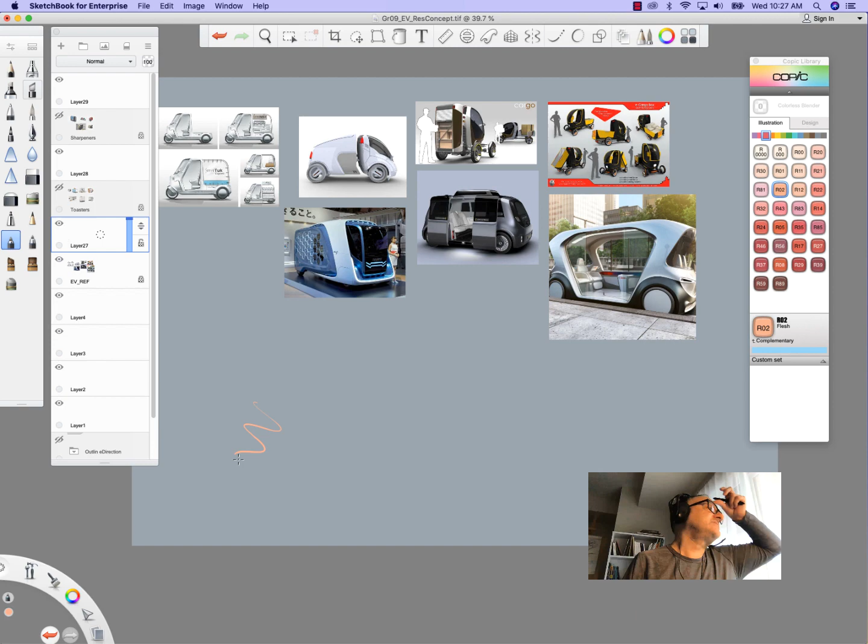I'm going to take some colors here and have some fun. I want you to look at my screen at this point, at the items I have here. I'm going to really simplify it without thinking too much about the technical side of how this is going to work. It's a conceptual exercise, and I'm just going to look at form.

Looking at this one, what do I see? I basically see this - boom, and then one over here. Don't worry about all these details. Ultimately this is a rectangle with some wheels in front. Then from the rectangle you get into another layer and start cutting these pieces. So this area here is simply for the delivery items to be stored, and this is, I guess, person-driven. Ours is going to be autonomous.

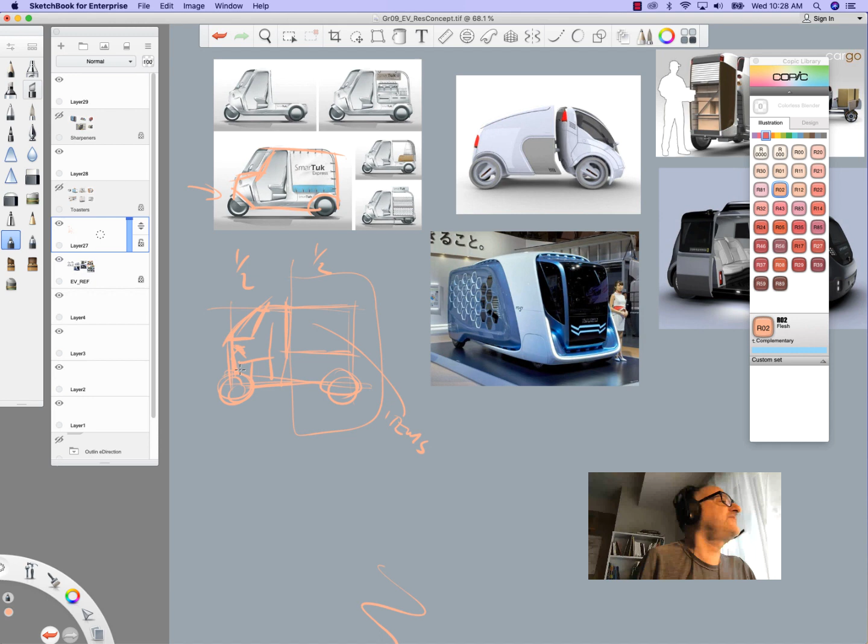So we do need a system in place. This is almost half, as you can see it's divided. If I'm looking at this without worrying about the details - don't trace this stuff and say here's my design - just think of the simplicity of form. There's a form, it's an electric vehicle of sorts, no problem. But at the end of the day, the design is simply this shape - a rectangle with wheels. Can we remember that? That's it.

Now let's look at the one over here. I have no idea what this is - it's an Isuzu - but at the end of the day, I'm looking at a rectangle again, with something here and another box here. These are the big shapes, so the wheels are in the back, somewhere like that. The form is simply a bus or a number of cubes, and you can divide this any which way you want. Once you have this overall frame and say it's a rectangle, then you come in here and it's kind of cool.

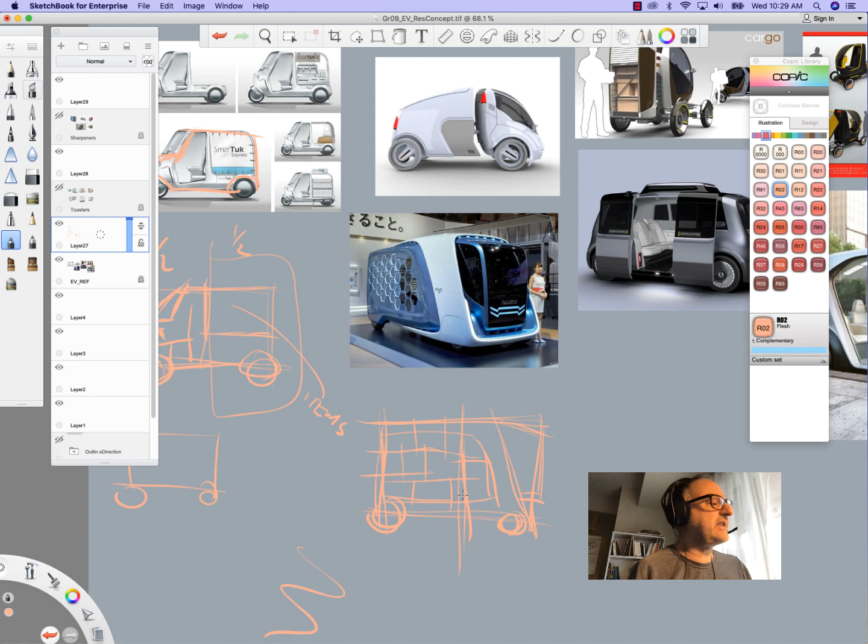I don't know, I can store all my groceries in boxes, I guess the mechanism is going to be here and so on. Right now it's just a rectangle. I'm just trying to show you patterns - that's where we're starting here.

If I go with this one, which is really cool, I like how it says to me maybe I have something here - it's 1/3, and then 2/3 is this. Notice again, same idea - the wheel is always somehow at the back, and right here it's this. That's all I'm seeing here. This is all orthographic, one view - you don't need perspective or isometric. Right now we're just analyzing forms, so there it is, 2 rectangles.

The minute I do this, look how cool that is. The design continues - we don't need to do this at the moment. We're just looking at it and going, okay, proportionally, this is what I see, 1 and 2.

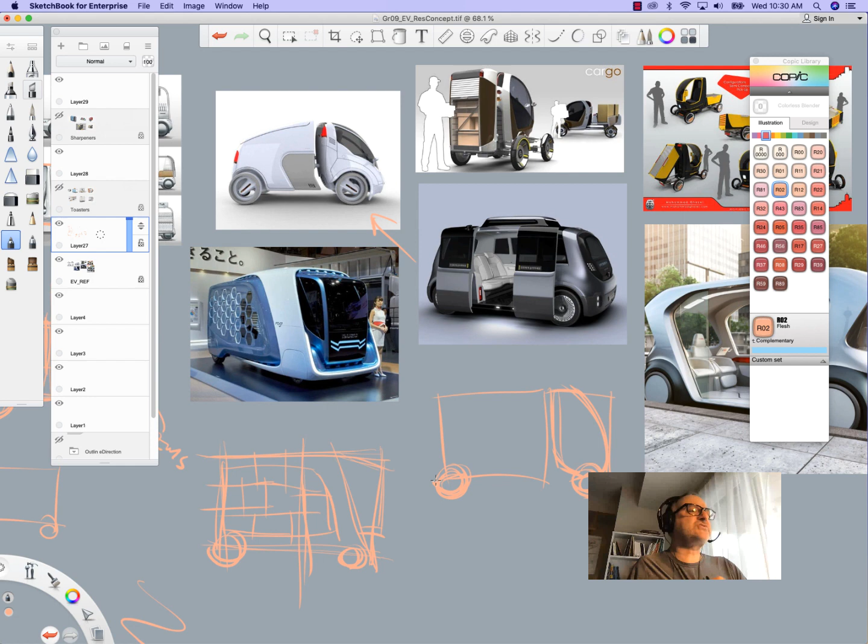So here I'm actually going literal. I've gone into the electric vehicle world, typed in Google 'EV delivery system', and found all these images. I'm just going to blitz through these. You can see here, this is kind of cool - this is definitely a delivery system and the person's in the front, but for us it's autonomous, something like this. Again, the 1/3 and 2/3 proportions - the wheels are here. This one is a little different.

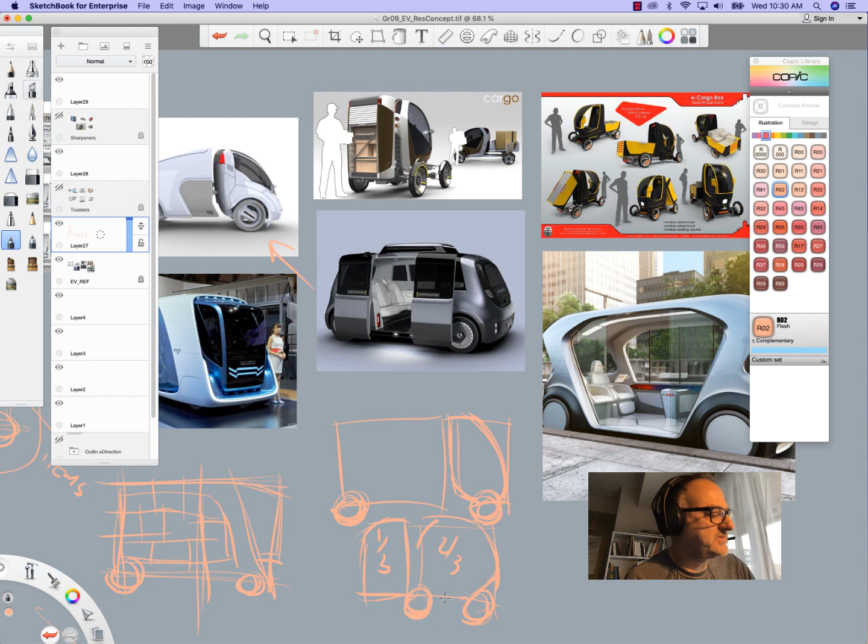Okay, and then once you're at the point later on in your design, that's when you add the curves. You can make it all very futuristic, maybe come down, whatever. So this is kind of interesting, it's over here. I'm gonna look at one more and show you something else.

This is literal, some of you will appreciate this later. Let's look at this one quite simply. All I have is this, guys, look: one towards the back here, and this is inside more. That's all that is. It's a rectangle, it's a box. Wow, how complicated was that, guys?

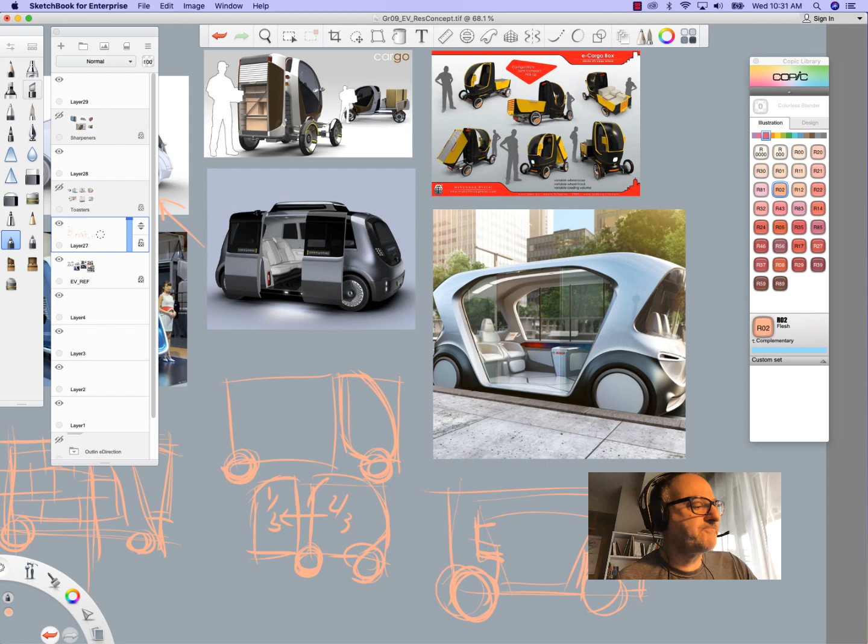And then the designer went in here and said, yeah I get it, functionally I have these seats over here, I have another one here for people to sit in. Maybe this is some kind of a bus mechanism. But it's kind of cool, right?

But look at this, you start with this, right? Here's the overall idea, then you chisel in, you go and say, oh yeah, this is where the autonomous system is, and I'm gonna start adding these curves. You see that, guys? This is design.

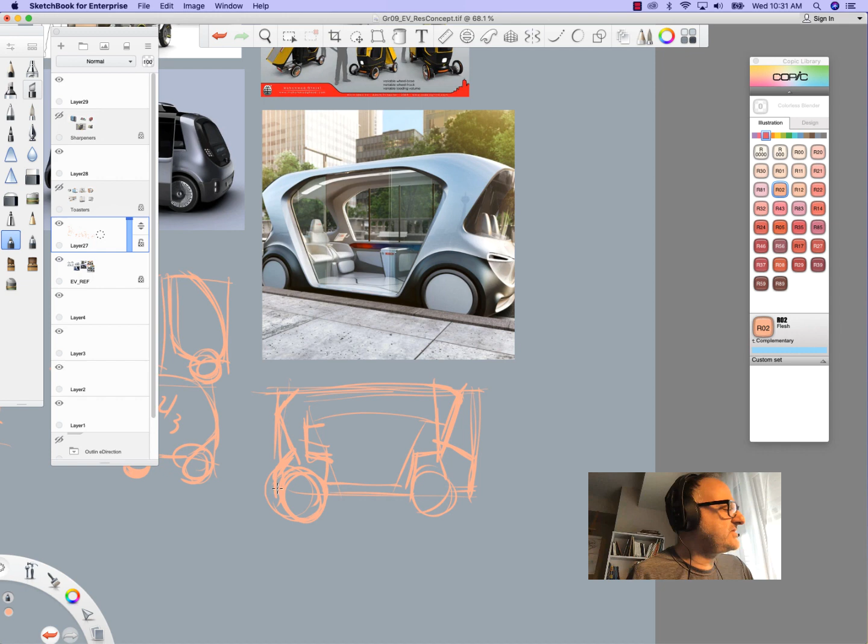You can't jump in and go, oh yeah, here it is, this is what I'm gonna do, Mr. Balian - I've got this idea that goes like this, there, and then here, and I'm gonna put a wheel here and another wheel here. You can't get there unless you start simply here.

Then you divide and say, okay, what do I got here? Well, I want my wheel to be around here, so that the back is all storage for me. And these are slot systems where things come out from the side, who knows. Okay, so really it's a box.

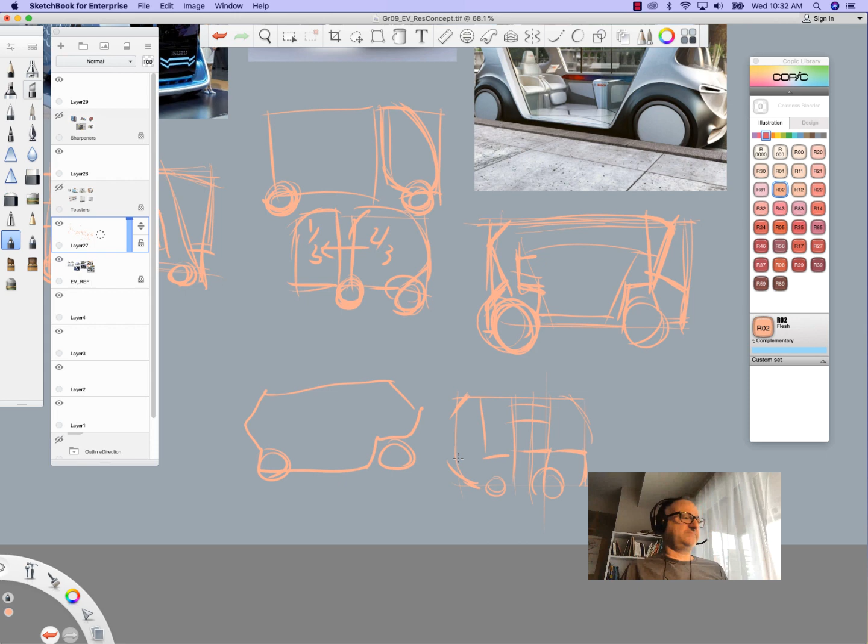And then you start having fun afterwards. You start going, yeah, you know what, I'm gonna make a room here, and I don't need this part, I don't need that part. You round off things and so on. So let's not copy, let's just open up our minds to possibilities, okay?

Now, as I mentioned, here's my hint: these are all electric vehicles, aren't they? And at the end of the day, I said to you guys, all I'm seeing here is a bunch of boxes. Look, rectangles. That's all I'm seeing, really.

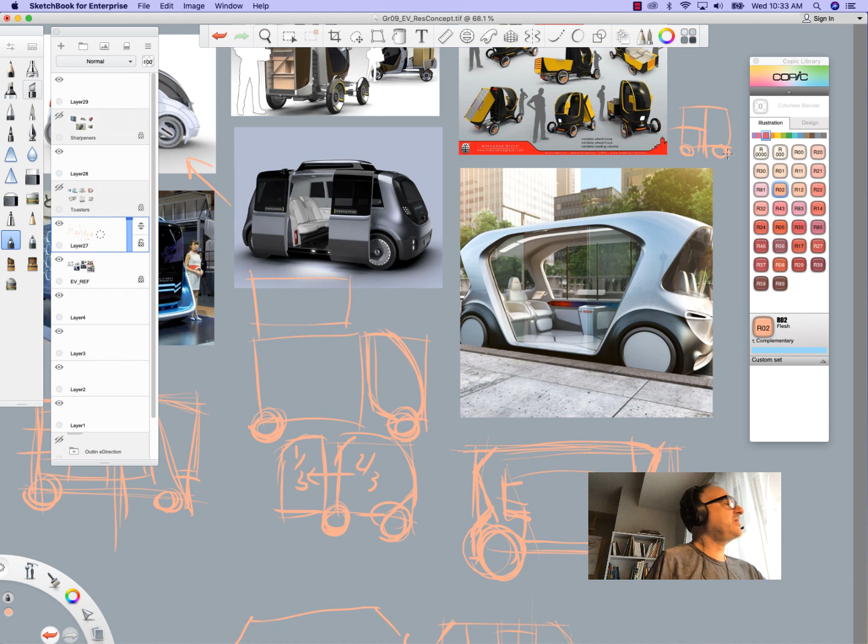Okay, this one again, this one's a box too, and I'll just go like that. That one has that division, and then you've got a wheel here and a wheel there. It's a box, that's it. Okay, so I'm gonna hide this, get ready for the next one. This is kind of cool.

This is how we change the frequency, okay? Whoa, what's all this about, Mr. Balian? Look, guys, these are toasters. So what if I use toasters to inspire me for this design? I don't know, I've never heard of that before.

So now we're taking away the literal research aspect of it, as in, always the first step is research what you know. But as designers, eventually, guys, this is stuff that people are doing at industrial design schools, at the post-secondary level. You're learning this in grade 9, okay? So look, I'll look at these toasters.

And I can say, look at that, oh my goodness. Let me just go up here on that layer, and I'll say to myself, well you know what, this could be a vehicle that has these kind of cuts in here. Okay, so you see, and then I can do that, whatever.

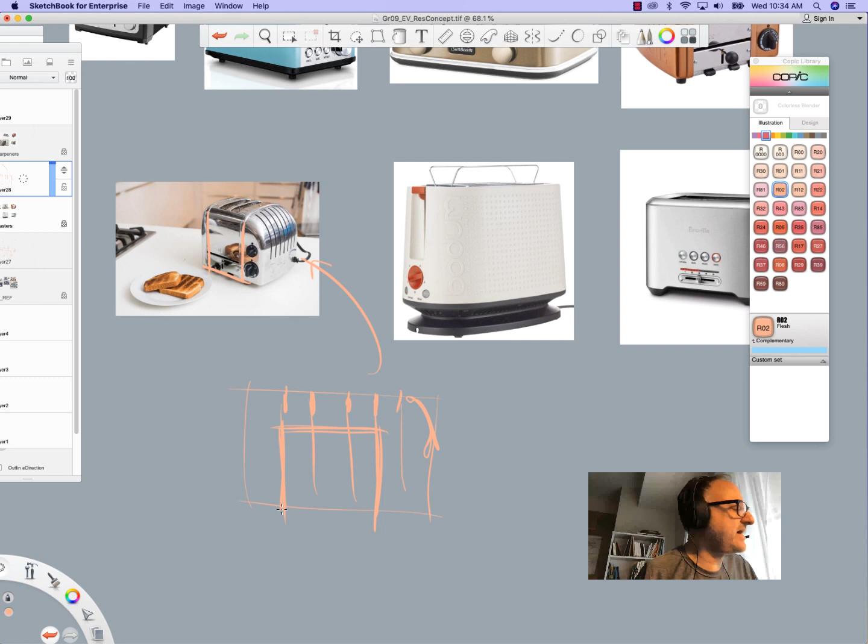So I'm learning, I'm also noticing that here and here there's a panel. So if I ever wanted to add a panel in my design, I can say this is where the items come in from, and here are my wheels. And then these ribs over here, opening light comes in, I have no idea, right?

So you can say you're gonna take that - I'm looking at this toaster and I see this kind of pattern here. What if at the side of my vehicle, my electric vehicle, there are solar panels? Never heard of it, but why not? In this pattern, see - I'm looking at things and I'm getting inspired, okay?

And I like the fact that there's the cutout here. So another item is, let's say this is the front of my car or my vehicle, who knows what, my van, I don't know what. I'm gonna make the front of the car look like this, okay? There's a cutout here, and this is the glass, and this is where the navigation system is, whatever. You see, I've just taken that and cut it out of a box.

Everything looks like a box. Okay, let's go. So again, you get where I'm going here, okay? If I look at this again from the front view, in orthographic view, all I'm seeing is this little line across, a big circle, and little circles here. That's all this is.

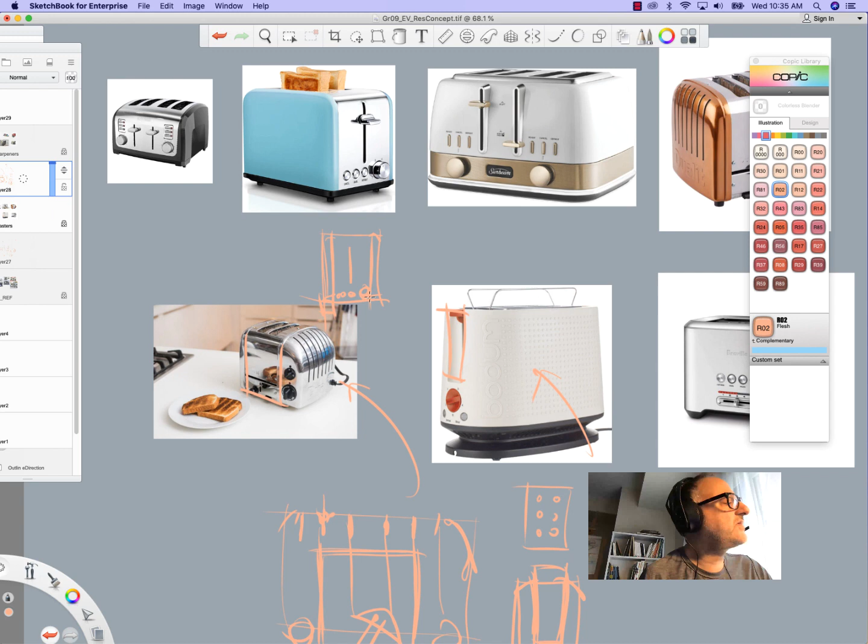So what if I had wheels here? What if I had wheels there? There's the front of my vehicle. Do you get what I'm doing? Side of my vehicle—oh, okay, I can have different panels.

See, I'm borrowing ideas. So let's look at this item here—I should have made these more spread out. Here's another one. Ready? Rectangle. Wow, that was tough. So here's a different material right here. You decide what that is.

Okay, so here's my system. I'm gonna go like that, one-third. I'm gonna go here, and I'm gonna make this all a panel of some kind. How cool is that, right? I have the other one right there. I'm done—like I've got a starting point, right? And the same goes for here and there. You get where I'm going with this.

This is becoming a long lesson. However, I'm just telling you that you don't always have to look at the literal option first. And second, don't fall for the trap of the details—look at the overall. What is it? Is it a cube? Is it a cylinder? What is the basis of the form? Is it a sphere?

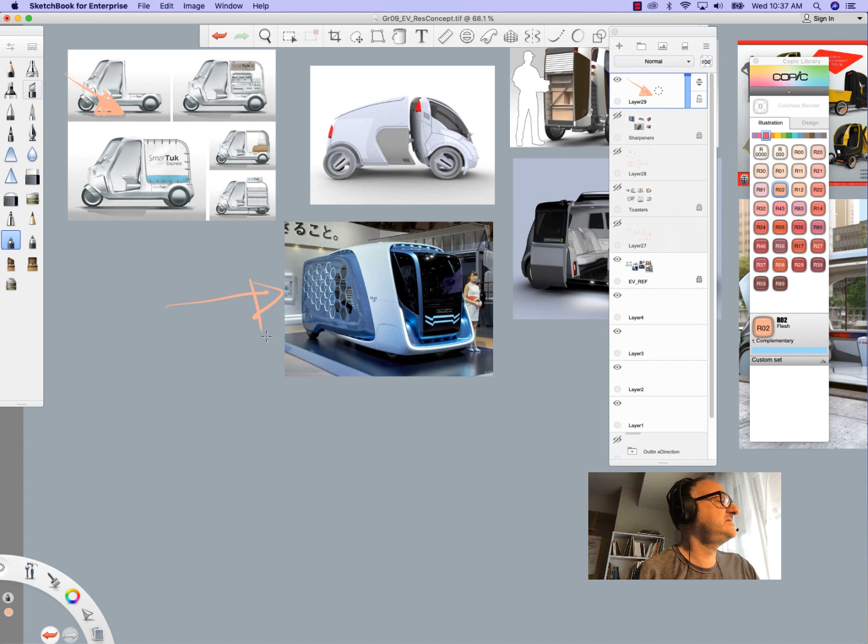If I had a vehicle looking at this, I see this happening here. Look, box and another box. I'm exaggerating here—this part is lower, that part is here. I can say, look at that. Look what I'm borrowing here. And this one goes like that. So these are just simple shapes. Guys, do you see how cool this is?

Okay, 1, 2—I just borrowed a pencil, electric sharpeners. Same thing over there. Here, what's cool is I could take this design, for example. Here's what I'm seeing—I'm seeing this, whatever shape that is, doesn't matter, but I'm seeing this, okay? So this could be my vehicle mechanism, right?

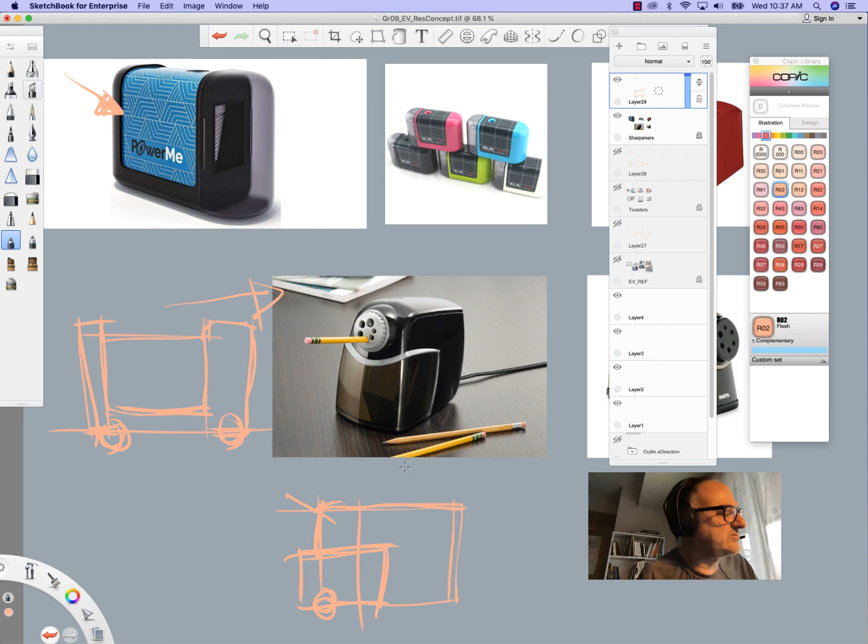And I can turn this here and go, okay, this is the autonomous section. This is all about storage, all this is storage, right? So look at things and borrow. Look at patterns, look at repeating patterns, okay? And here you can come back from this.

I would draw it again, okay, I would draw it again. So let's go like this, really fast. Boom, boom, boom. And then, yeah, I get what this is. So now I'm gonna have fun. What if this was something like that?

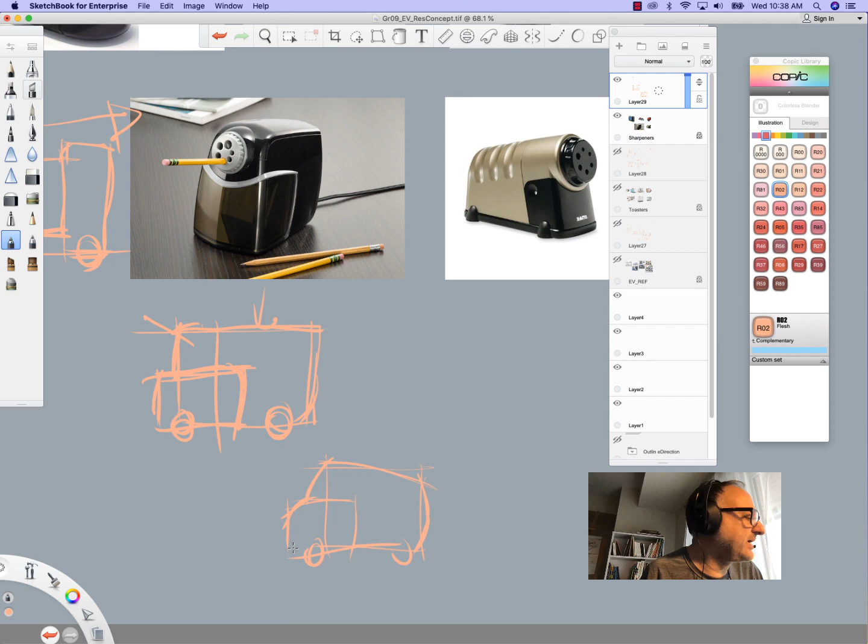What if this was turned this way and this had a little curve? This one here, I'm gonna bring it like that. You know what I mean? Like, look at the difference. 1, 2, 3. And if you go to 4, what's stopping you from—you know what I mean? Like, what if you had some panels that were going this way and you just added that here? So do you see what I mean?

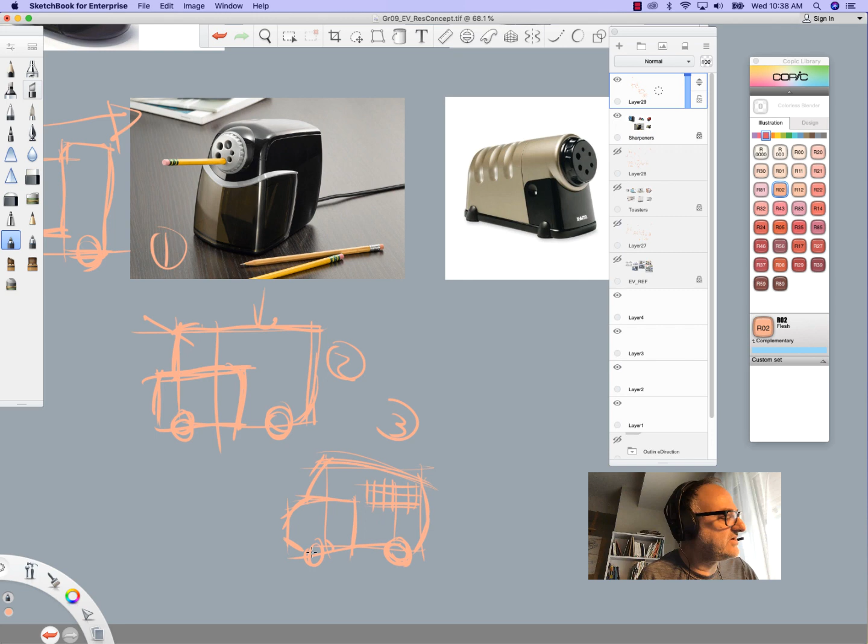Like, build—don't go for the end result. Take your time, duplicate an idea, add more to it, okay? So I'm looking at this—this is very industrial looking, right? Reminds me of like little water plants, filtration plants.

So to me, if I was to take this shape here, I would say, okay, well maybe this is the rotating mechanism that goes in here and picks up items that are here and so on. Like something comes out and picks up your box and then goes out here. I don't know, but that's kind of cool too, right?

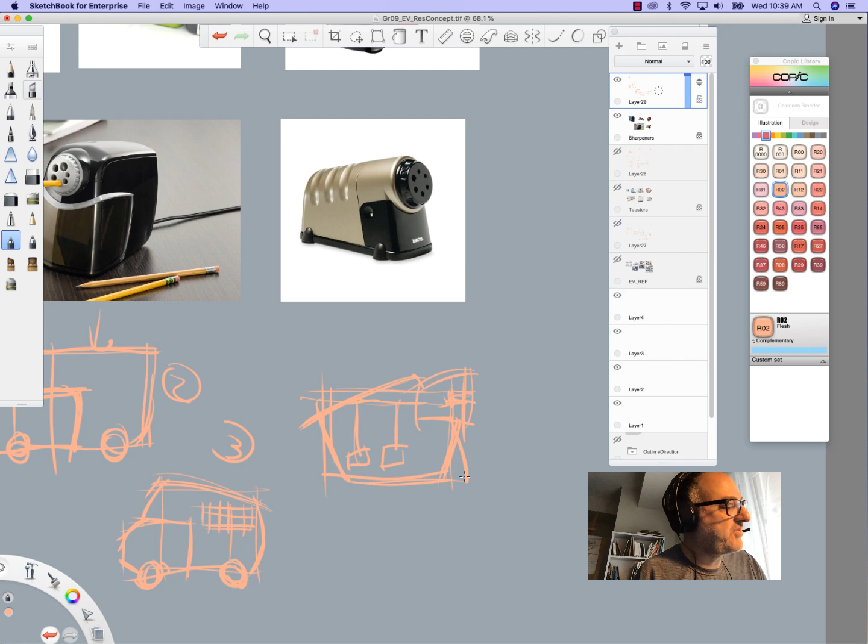So you've got this happening. Look at that design, look how cool that is, right? You can come in here and turn it. And I've got this one. Wow, this one's going out, right? And here's this, right? See how cool that is?

And then for the wheels—look, wheel 1, wheel 2. Very original, right? Okay, you get what I did here, right? All this is very cool. I'm gonna stop right here. Okay, so here we go.

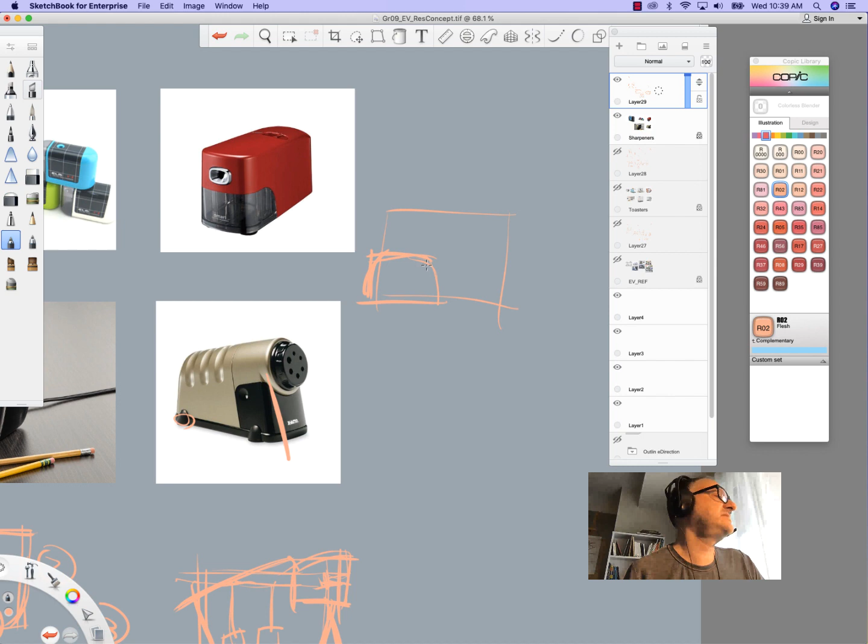One, really fast, and then you go, oh yeah, this is my mechanism that actually is setting up my—the mechanical autonomous system is here, the rest is storage and so on. So this is just the starting point. Have fun, guys, okay? Take elements, anything.

You can have a grill from a car as a side panel, okay? You like Maseratis, for example, or Alfa Romeos, who knows. Take something, okay, and bring it in here. Take images, make a collage. This is all fun for you guys, okay? I know this has been a long one for you. I'm gonna stop here.